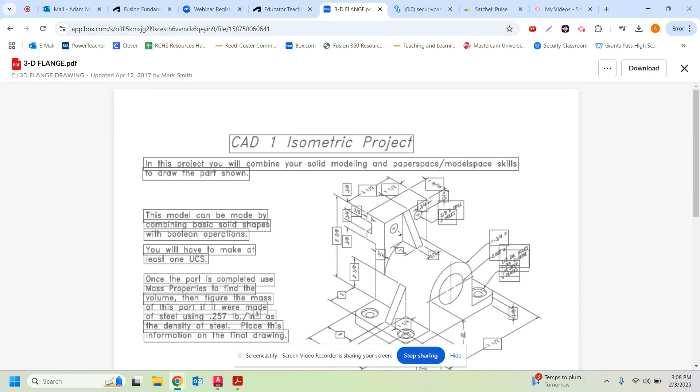Okay, when we left off here, we ended up with, if I go to AutoCAD, we should have basically what you're looking at here. We've got our wedge shapes here, we've got our back section here.

Now, off camera, I did use the union tool and combine the two shapes you had here. If you're just doing that, all you have to do is click the solid union button right here, then choose the two shapes that you want to join into one, and hit enter, and it should take away any lines that separate them.

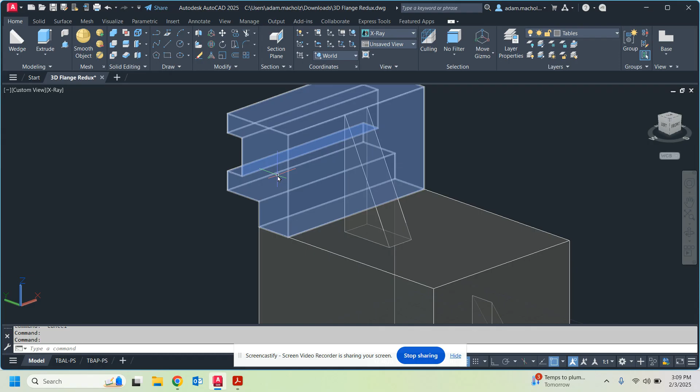So right now this is one piece, and I did that because the next step I'm going to drill some holes in this. I'm not really going to drill them, but that's how I like to refer to it. That way it's less work later, I guess. So it's not much less, but it is less.

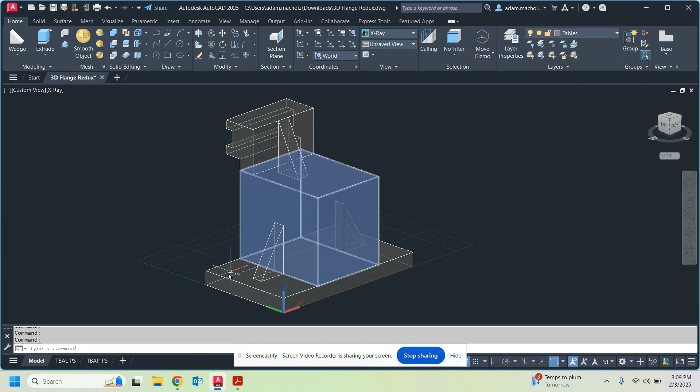So I'm going to start with these back two holes, and I'll just work my way down as I go. We need a hole here, we need a big hole here, and then we're going to have two sets of holes in each corner, one all the way through and one a little wider but not quite all the way through, like you would drill something to make room for the head of a screw or a bolt, to be recessed and flush along a surface. So we'll take care of that there.

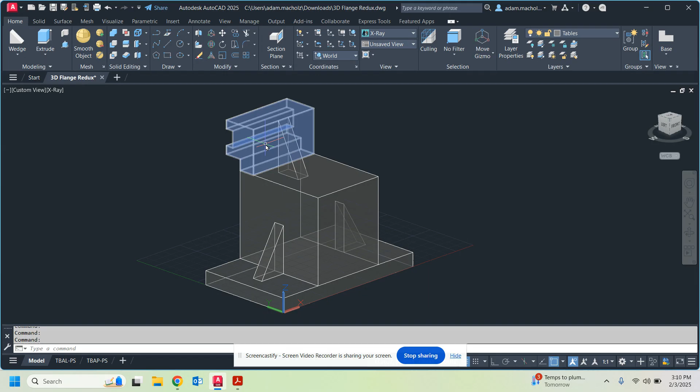Okay, so I'm going to take a look at my drawing, and I can see that these holes are 3/4 inch from the top, 3/4 of an inch from the side, and they are 5/8 inch in diameter. I'll probably have to come back and look at that again, but I know 3/4 and 3/4 I can keep in my head. So let me get that out of there.

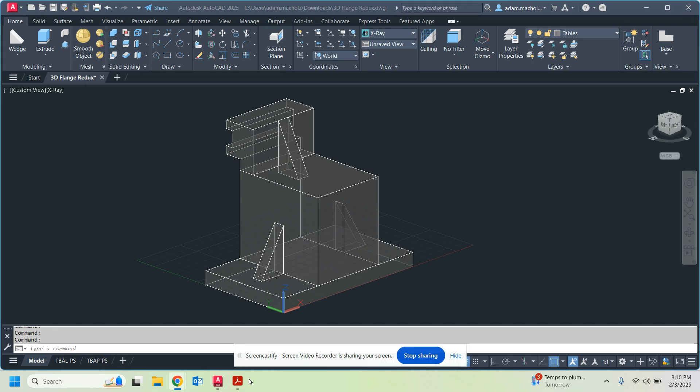Let's do that. I'm going to just use ID, and I'm going to choose this corner right here. You could choose either one, but the numbers you type in will be different depending on what you do. So I'm going to type ID, come over to here, and choose a cylinder. From that point I ID'd, I'm going to hover my mouse over this front face, and that tells AutoCAD that the coordinates I'm going to get are going to be based on that face.

So then I'm going to type in my center point at 0.75, comma, negative 0.75. And then that should bring that there.

Looks good to me. I'm going to choose a diameter. I said I wanted a diameter of 5/8 of an inch. Well, 4/8 of an inch is 0.5, same as a half. 1/8 of an inch is 0.125. So if I do 0.5 plus 0.125, I'm going to get 0.625 as my decimal diameter. And I'm just going to go ahead and have this go way back.

There it goes. Hooray. All right, now I can actually just use the mirror tool. I could do the same thing over here and use negative numbers, whatever. There's so many ways to do stuff in AutoCAD, but I enjoy using the mirror tool.

So I'm going to choose mirror, choose my shape, hit enter, and then I need to choose an axis through which to reflect that. So I'm just going to go and choose the middle of these shapes. Note how I chose the middle of the back, middle of this edge right here, and I'm going to go straight down to the middle of this.

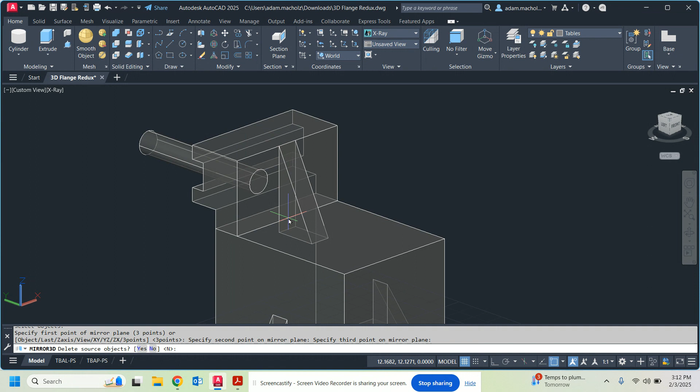Nothing happens because it says delete source objects, and it says N in that less than greater than sign. That means no, I don't want to delete the other one. So I hit enter, and it will mirror it around there.

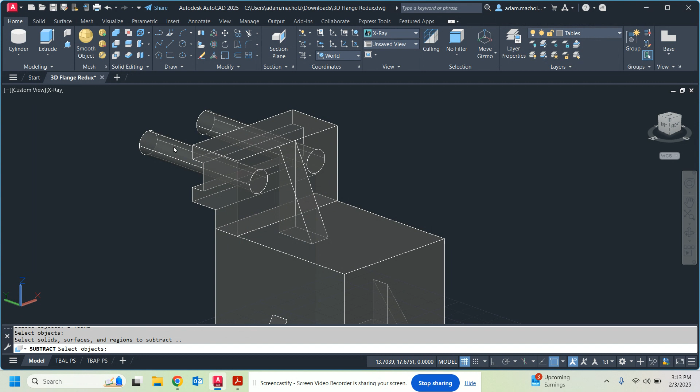And at this point, what you can do, I said it would be a little easier this way, so I'm going to choose the subtract from my Boolean area here, and to subtract, I'm going to subtract from this shape, and the thing I'm going to subtract is this and this.

So I click those, I hit enter, and voila, we've got some holes in my shape in the right spot, and they're the right size.

So there we go. All right, I said I'm going to work my way down. I'm not going to worry about the arching bit right here just yet. That's a little bit more in depth, but that will come later. So I'm just going to worry about the things that I'm drilling straight through. A little easier to wrap your head around. The other one, it's not too bad. I've set you up for success. If you've scaled this guy and moved it, you're on the road.

So let's take a look back here at my flange. I can see that this circle right here, the middle of it is 2 1/8 inch from the bottom, and I know it's centered right here. It doesn't give me an indicator, but visually I can see it. I can reason that that's the case. If it was different, it would probably be dimension. So I just need to find the middle and 2 1/8 inch from the bottom. But not the bottom of the bottom of this edge. So let's go back here.

And so let's see, I can do this a couple of ways. I'm going to go with ID. I'm going to ID this corner. Whether I use that number right now, I will see. I think I will. I'm going to choose cylinder, and I'm going to light this face up blue.

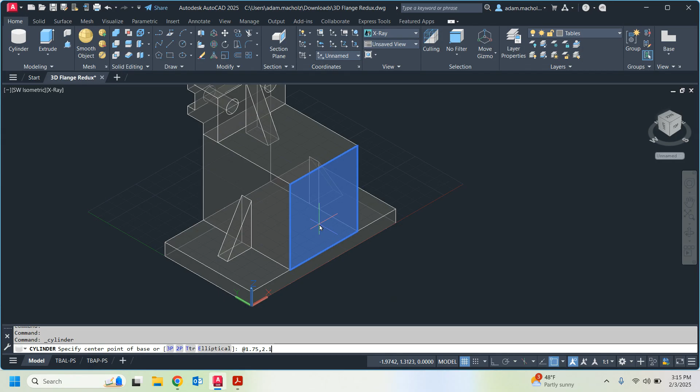And I'm going to go comma, and I'm going to go, that was 2 1/8, I think, but it's worth checking. 2 1/8, so 2.125. That should get me right exactly in the middle, and that should be a 2-inch diameter. Double checking, yes, that's a 2-inch diameter. So I hit the letter D for diameter, and then I type in 2. Boom, there it goes. And then I just make sure that I go all the way through the back.

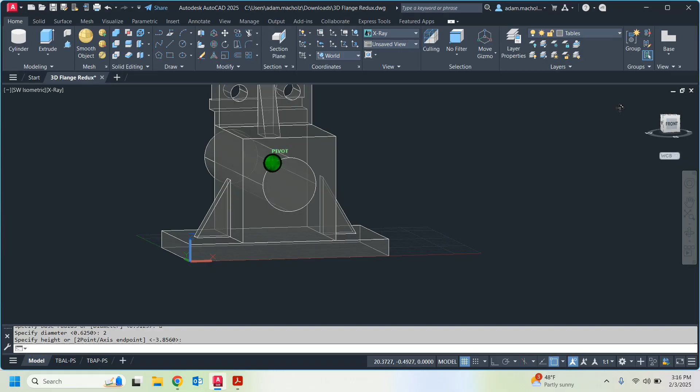And then I can subtract this one now, or I can wait. The other thing I want to check before I do subtract is that it doesn't interfere with this wedge. If it's going to go through this wedge at all, then I need to do another union first, which wouldn't harm anything if you had to do that, but you want to do it before you need to.

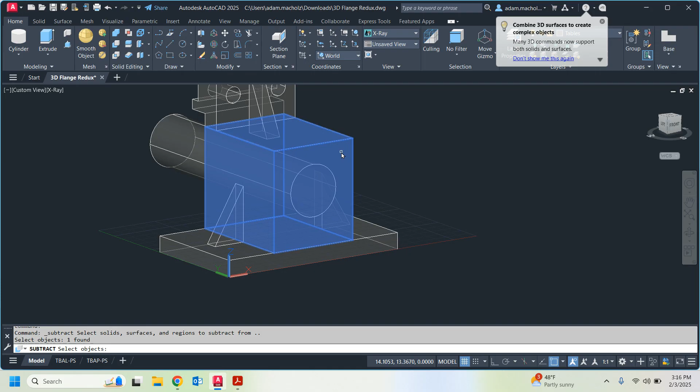Okay, so I'll choose my subtract again right here, and I'm going to choose my object I'm subtracting from, hit enter, choose the one I want to take away, enter again, gone. Kind of looks like it's like, oh no. There used to be a guy named Mr. Bill, I think, on some TV show that I never watched, but he was famous for saying, oh no.

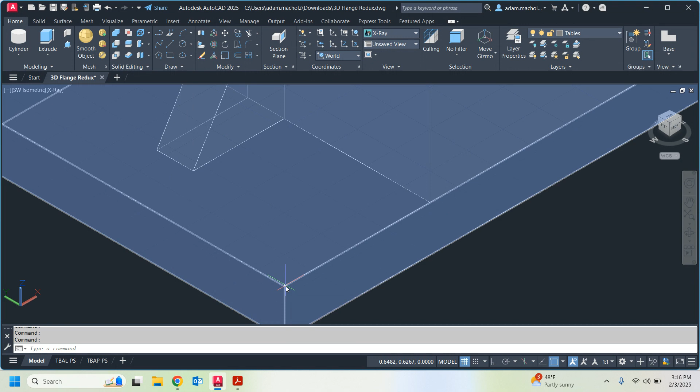Now this is where it's a good thing we didn't fillet our edges. You always want to wait till the end to fillet or chamfer any edges, because you still want to deal with your corners on your terms. And if you round these early, then you got to do a little bit of work. It's not impossible, but it is more work to do it ahead of time.

So I'm going to head back to this here, and it looks like from the edge I'm 3/4 and 3/4. Okay, and let's see, I can see that one of these, I'm 1 1/4 inches from that edge. I don't really need that because I have this edge, but this doesn't tell me the diameters of these holes. So I have to look here. I've got 1/2 inch diameter holes and one diameter, that would be 1 inch diameter counter bore. So this bigger one is my 1 inch diameter, smaller is 1/2.

The 1/2 inch hole is going to go all the way through. The counter bore is this one that makes room. You might have heard us use the term countersink in a different class if we countersunk holes. And we're going to have that in 4 places.

So let's do the drill hole all the way through first and set it up, and then we will set up our counter bore hole. I'm just going to choose one: 1/2 inch diameter, 3/4, 3/4. Let's go with that. I'll do one corner first.

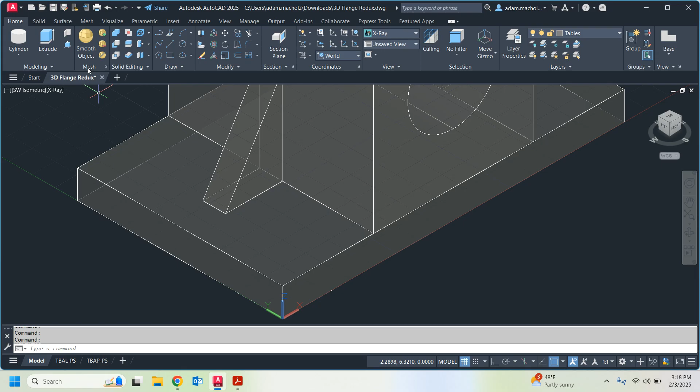I'm going to use the mirror tool this time as well, because I love it. When you can use it, it makes it so easy. Okay, from here, highlight the blue. I did my ID, I didn't say it out loud, but I did it. I ID'd this corner. From here, I'm going to go at 0.75, comma 0.75.

Enter. Bada bing. And it's got a 1/2 inch diameter, so I hit D, and that is 0.5. Enter. And then you can just drag that down through the bottom. As long as it's poking through the bottom, you are good.

At this point, I want to do my other hole, so I choose cylinder again. This time, if you grab the sides, you'll get a little cross there in the center, and that'll put you right back on the center of the other one, which is great.

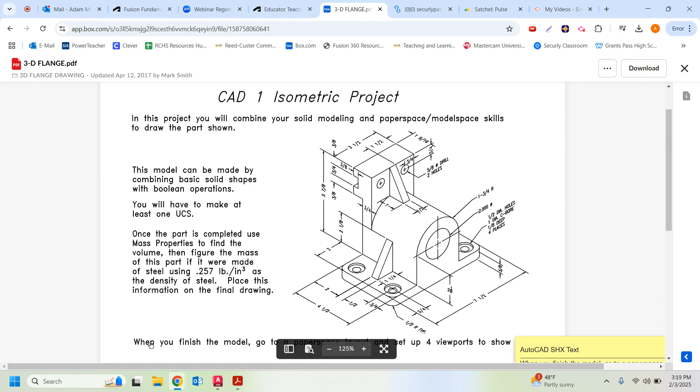So now this one has a diameter of 1, so I'll go with that, and a depth I think of 1/8 of an inch. 1/8 deep, 4 places. Okay.

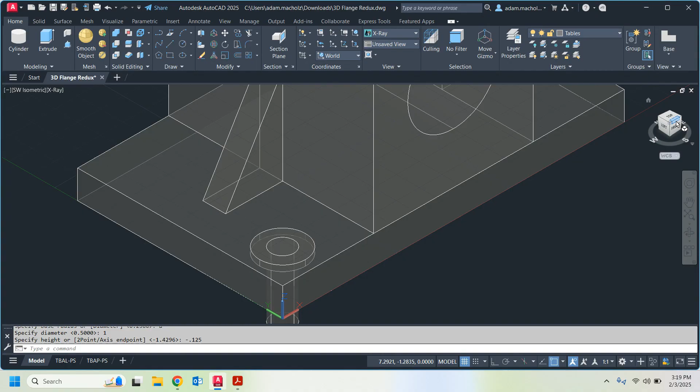So then we're just going to go 0.125 negative. I thought I typed a negative 0.125 - oh, I hit a 0 last time. We'll do that. And looky there, that looks good. Let me check it from the front to make sure it didn't go up, because sometimes it looks like it went the right direction, but it didn't.

So now I'm going to use the mirror tool, and it doesn't matter what order you go in really, but let's go ahead and use it. I'm going to go to 3D mirror. I want to mirror the outside and the inside circle, both objects, and then hit enter.

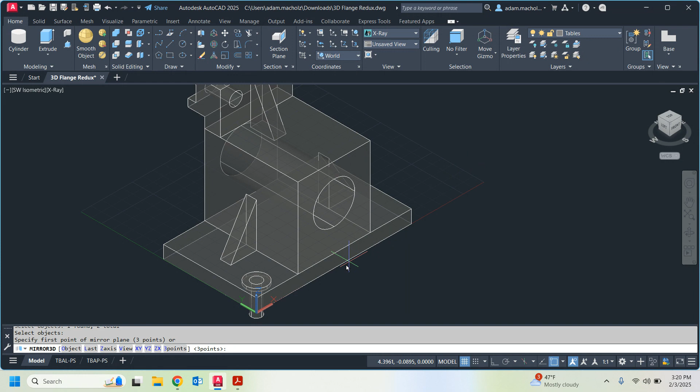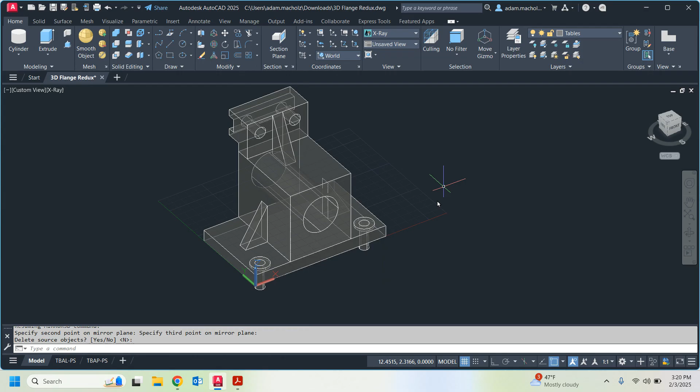And then the plane that I want to mirror them through is going to be the middle of this. Let's go up to the middle of... oh, change my view just a little bit. It doesn't want to snag the middle of this one, the middle of that one. And then somewhere along here, like that one. We don't want to get rid of anything. Look at that. You could also do this with another tool called an array.

But for this instance, I think this is going to be the best tool. So I'm going to go back to mirror now, and this time I'm going to mirror both this one, this one, and this one, and this one, and we're just going to go to the back, so it'll place them automatically where I want them to be. So I hit enter with those 4 shapes selected, and then it's going to have me choose a plane.

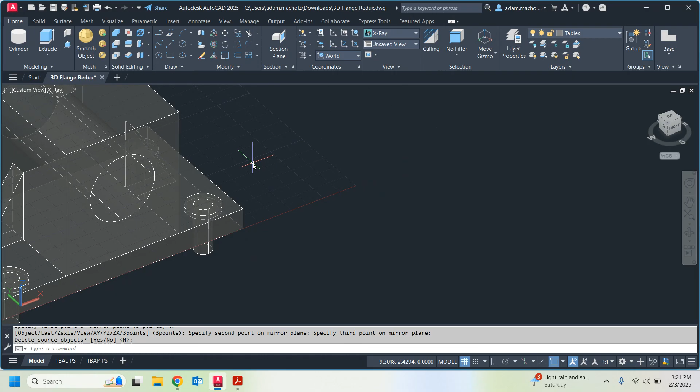So this time I'm going to choose the middle side over here, choose the middle of this piece over here, and let's go all the way over to the middle of this one. No, we don't want to delete. There it is, ready to go.

So now I am just going to subtract. I'm going to grab my subtract button right here, and I'm going to click the shape I'm going to take away from, the shape from which I'm going to take away, if I want to be completely grammatically correct. And I hit enter, and now I'm going to start clicking my cylinders.

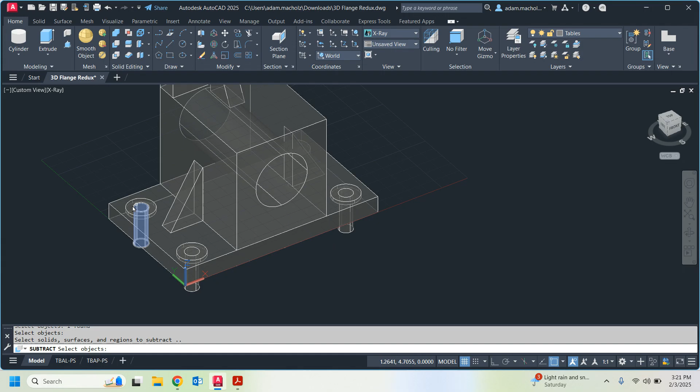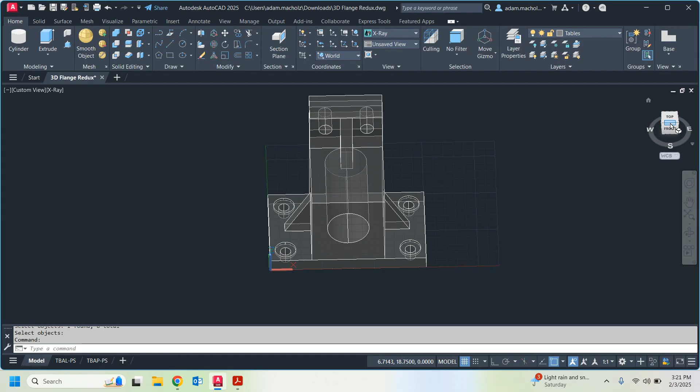Come on, there it goes. There it is, hit enter. There we go, got counterbore holes. It starts to look pretty good pretty quickly. There we go.

So that should be all the holes I need. You know, it's worth sometimes looking around back. I'm pretty sure those do go all the way through, and they do.